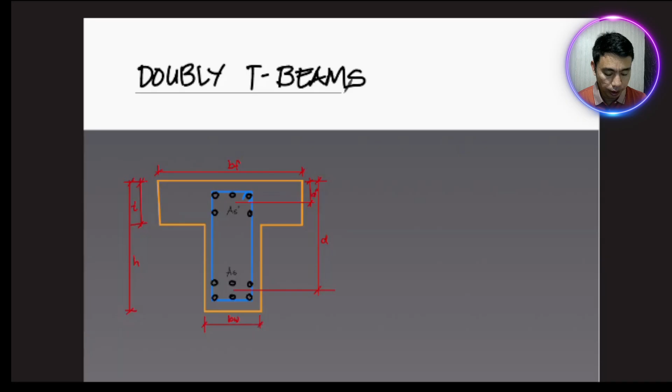Doubly T-beams. This is a continuation of our discussion regarding T-beams. Previously we discussed the design and analysis of singly reinforced T-beams. This time we move on to doubly reinforced T-beams. So this is still T-beams, but we're going to use the concept of doubly reinforced beam. It's a bit more complicated since it's doubled.

The basic concept here is we need to determine first if this is to be designed or analyzed as a T-beam or as a rectangular beam, just like the normal singly reinforced T-beam. We have two cases here, actually many possible cases, but the first step is to determine if we are solving a rectangular reinforced beam concept, or is it a T-beam.

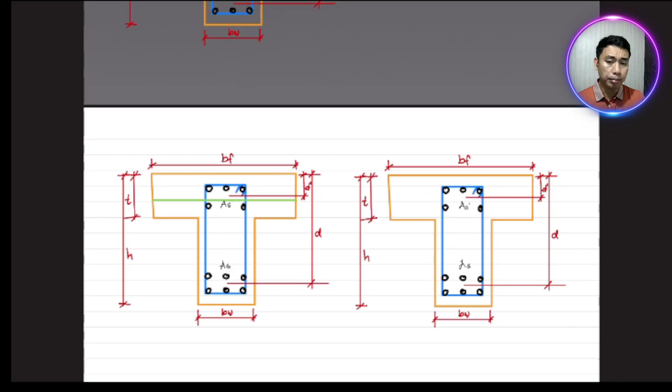So when can we say that the section must be designed as rectangular? We know the concept, let me show you. In the first figure here, normally the compression of concrete is at the top, if simply supported and the section we're analyzing is at the midspan.

Now if the area of concrete being compressed, that is our compression block, if the depth of the compression block is not greater than the thickness of the slab, or the T section, then this case will just be analyzed as a rectangular beam, like a normal rectangular beam.

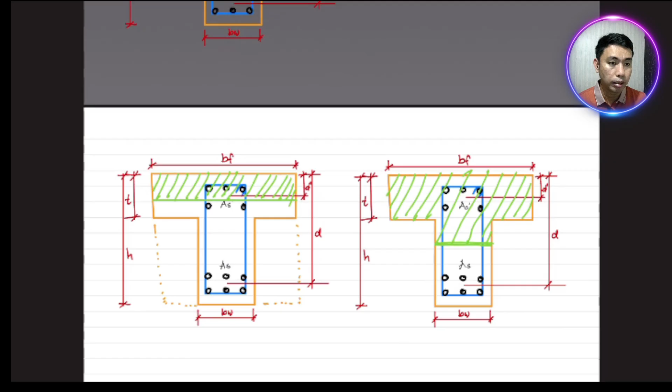Now in the case of a T-beam, if we found out that the depth of the compression block of concrete is greater than the thickness, let's say in the second case here, you can see in your screen, the compression of concrete reaches down to the bottom.

So this time we need to add another variable that we commonly term as this distance, Z. Overall this is our compression block, A. On the other side, this is just our A. A here is less than the T section thickness, while here, A is greater than T.

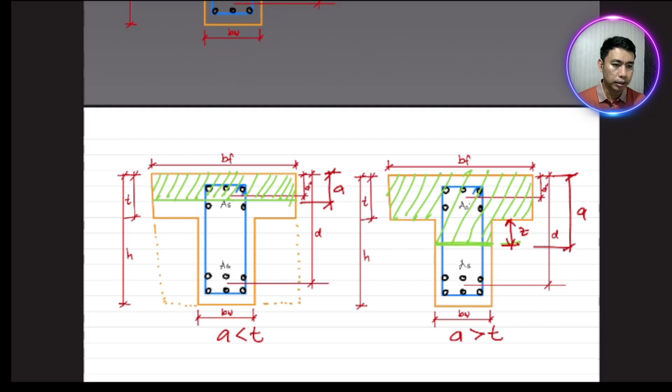So there are two cases. Now let's add the concept of doubly reinforced. In doubly reinforced beams, we again have two cases. You can see here, this is As, and this is As prime at the top.

So there are also two cases depending on whether our steel yields or not. Remember that in doubly reinforced beams, sometimes we need to assume first whether it yields or not, then check our assumption if it's true that it yields. So there are two cases. The first, let's start with when it yields: Fs greater than or equal to Fy, and Fs prime also yields, greater than or equal to Fy.

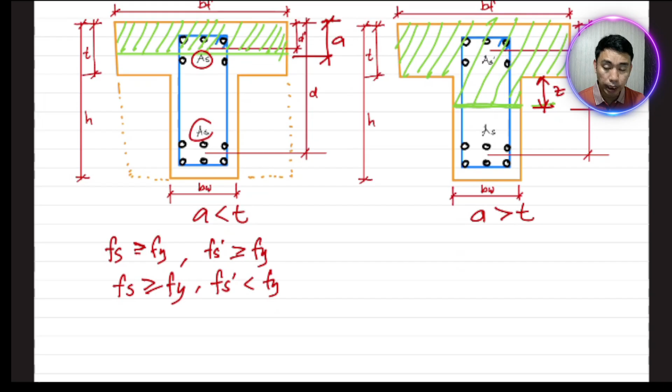More on that will be discussed in our example. Okay, let's have this example.

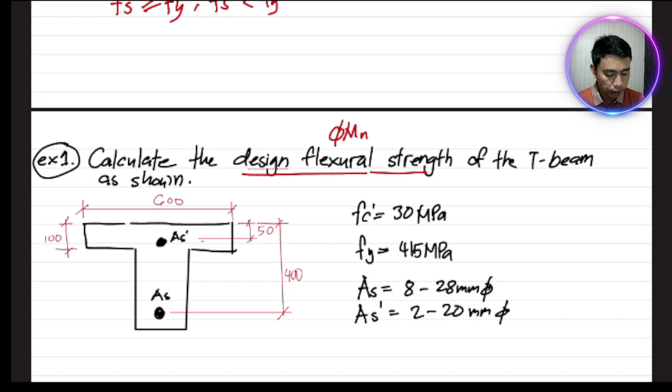Calculate the design flexural strength. When we say design flexural strength, this is phi Mn, there's a phi. When there's no phi, it's just nominal, just Mn. When it's design, there's a phi. So, calculate the phi Mn of the T-beam as shown.

So we have a T-beam. Can you see it on the screen? Is it clear? Okay, so we have BF equal to 600. And then we have this one that's missing, this is 250. So the thickness of our slab is 100. And then we have As prime.

Meron palang AS sa baba. Ang AS natin sa baba is meron tayong 8 na 28mm as AS, while ang AS prime is dalawang 20mm lang.

So ganito lang ang ilagay ko dito, ideal lang na vertical lang na steel.

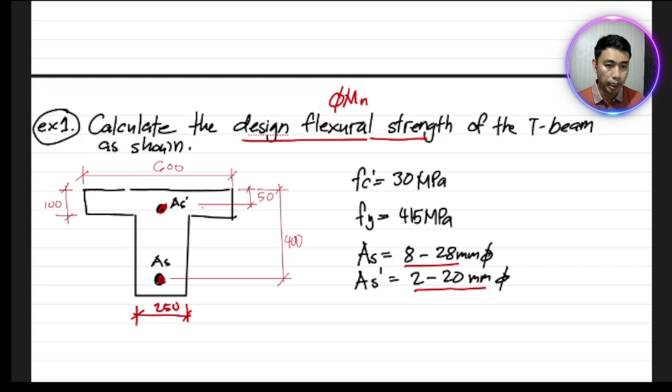Let's solve this one. Before solving, maybe we can compute first, sa book makikita ninyo hindi niya ginasolve una yung total area ng steels. So for me, I just like to solve first para hindi tayo magbalik-balik o hindi na madagdag doon sa equation.

We can simply compute AS is equal to 8 na 28mm, so we can have 8 times pi times 28 squared over 4. Using the calculator, this will be equal to 4926.017 mm squared.

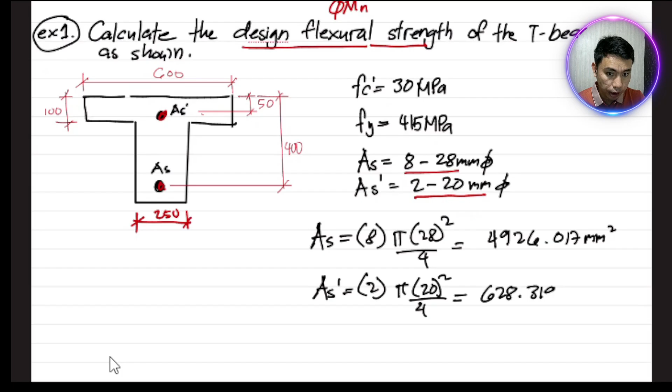Now our AS prime is equal to 2 times pi times 20 squared over 4, so this is 628.319 mm squared. How about beta 1?

Let's solve na lang yung beta 1 kasi para hindi na tayo magbalik mamaya. So beta 1, this is 30 megapascal, so greater than 28. That means our formula is 0.85 minus 0.05 over 7 multiplied by the difference of FC prime to 28. So this is 0.836.

The first step we are going to do, let me add page, is to check first if doubly or singly reinforced. So how do we check if doubly or singly?

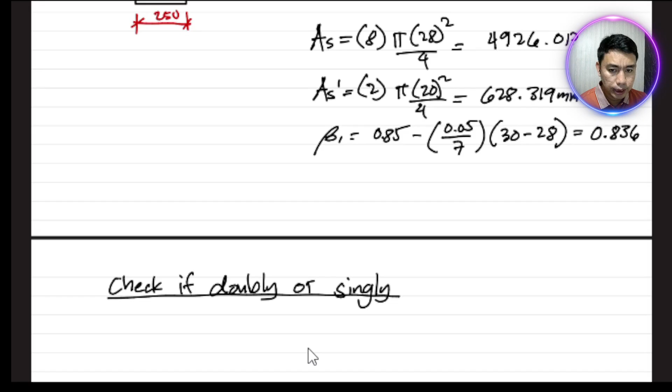By the way, let me go back. Ang D natin dito, if you look at the figure, ang D natin is 400, while the D prime is 50. Now let's check if doubly or singly.

Paano tayo mag-check ng doubly or singly? So we will base that to rho max. Ang rho max, this is the value, the maximum value of the rho wherein we are still in singly reinforced. Any actual rho greater than rho max, then we can say that that will be doubly reinforced.

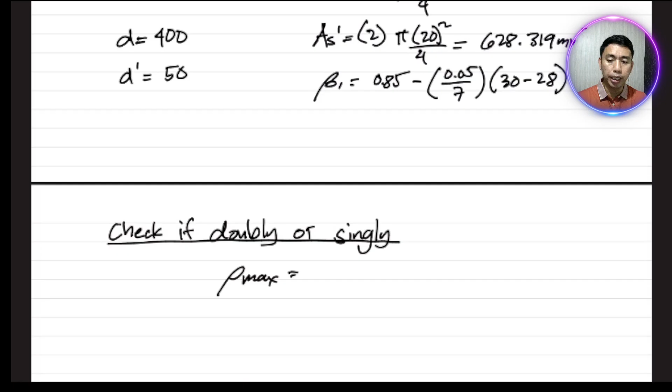So rho max is 0.85 times beta 1, FC prime over Fy, times 3 over 7. Let's plug in 0.85 times 0.836 na beta 1 natin. FC prime is 30, the Fy is 415, times 3 over 7. Using the calculator, this is...

0.02201. Now let's compare that to the actual rho. Actual rho, base lang sa singly reinforced yung actual rho natin, so that will be AS over BW times D.

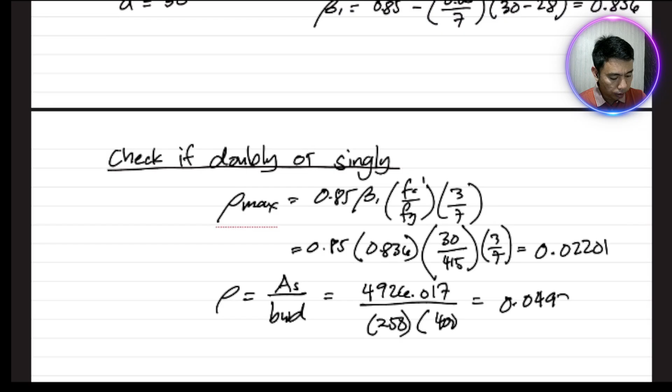So this will be AS natin is 4926.017 divided by 250, by D natin is 400. So this is 0.04926. Here we can see na rho is greater than rho max.

Therefore this is a doubly reinforced. Okay, so dito na tayo sa doubly reinforced. Analysis natin sa doubly reinforced, first is we need to assume, that's ganun naman talaga always sa analysis.

By the way, dalawang concept ito: analysis or design. Ang analysis or investigation, meaning meron ng section, meron ng area ng steel, and then we just investigate what is the maximum or what is the capacity, determining the capacity. Pero ang design, it means determining the steel area. So analysis and design, yun yung kaibahan.

So sa analysis, mostly mag-assume talaga tayo na yung steel natin is mag-yield or not. So the first thing is first assumption: assume all steel will yield. Anong ibig sabihin nun? Meaning ang Fs natin is equal to, at saka Fs prime will just be equal to Fy. We'll always start with the easiest assumption kasi kung hindi mag-yield, medyo makikita natin sa calculation natin mamaya, medyo nakakalito yung equation.

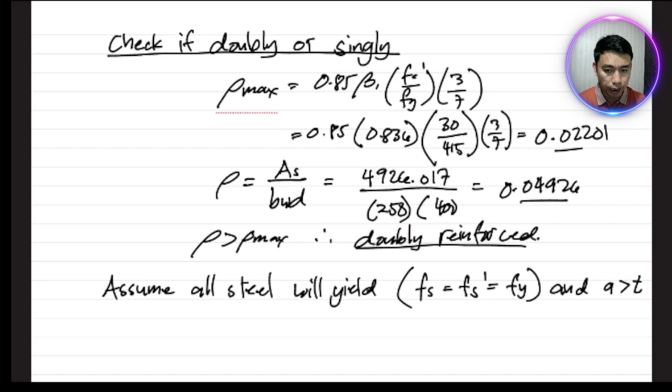Okay, so paano natin i-solve yan? So mayroon tayo, if I go back here sa analysis ng T-beam, sa baba, mayroon tayong compression, tension di ba, meron tayong tension dito, tension ng steel. And then dito is compression, compression ng concrete, CC, at saka compression ng steel.

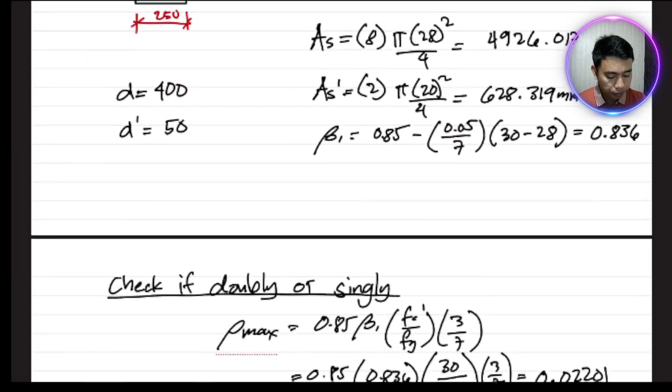So tatlong force ito: ang tension ng steel, compression ng steel, yung sa taas na compression na steel, and the compression ng concrete. So dapat mag-equal itong tatlo. Since we assume na all steel yields, meaning ang compression ng concrete plus compression ng steel should be equal sa tension ng steel, yung sa tension part ng steel.

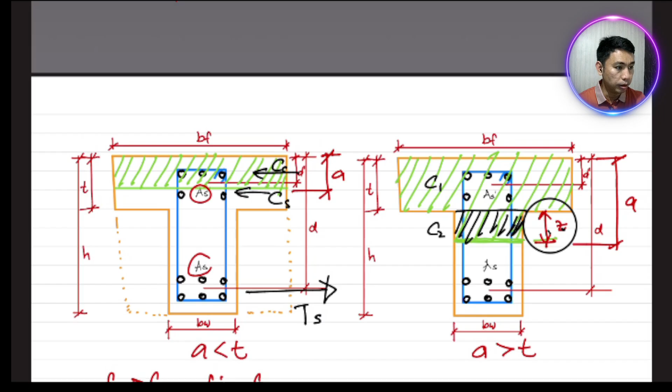Ito, dito na part. So, this is C1, ito yung C2, sa compression ng concrete. Ano nga yung compression block ng concrete? 0.85 of FC prime times the area ng concrete, let's say A1, kasi meron tayong dalawa, A1 at A2. Then another 0.85 FC prime times the second area yung sa baba. Plus compression ng steel, ano yan? It will be AS prime times FS prime. This should be equal to the area of steel times the stress ng steel.

Now, it turned out that the Fs and Fs prime is just equal to Fy, which meron tayong value. So we can just solve the equation here: 0.85 of FC prime is 30. Ano yung area 1 natin? Yung thickness, thickness 100 times BF. Thickness times BF natin is 600.

Area 2, yung sa baba ng T-beam, is 0.85 of... ano yung depth? Yun yung Z. Maybe I'll change the color of Z para ma-identify talaga natin kung ano yung hinahanap natin. Z times the BW times 250. Ito yung area 1, ito yung area 2. Then plus AS prime, FS prime.

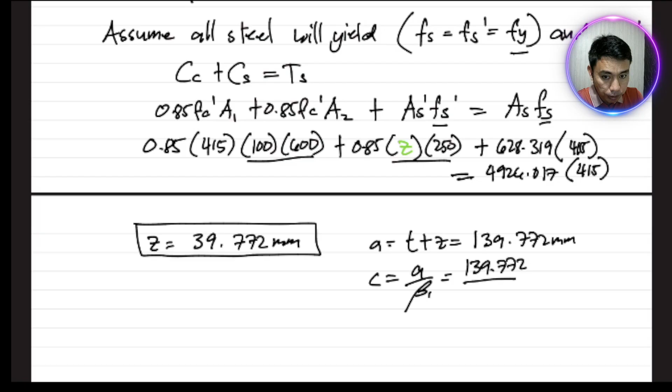C is A over beta 1. So this is 139.772 over beta 1 natin, I forgot the beta 1, 0.836. So this is 167.248 mm in C. Now, bakit ko kailangang isolve itong C? Because we need that to check our assumption.

Okay, check yung assumption natin. Let's start with Fs. Check natin kasi nga nag-assume tayo dito. So, sa mga assuming dyan, you need to check. So, check assumption. Fs is equal to 600 times D minus C over C. Kung nag-study ka ng double reinforce, familiar ka na sa this one.

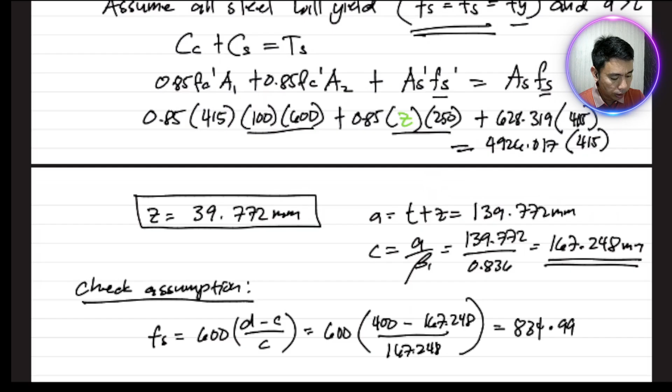So, this is 600 times D natin is 400 minus C, 167.248, over 167.248. So, ano yung Fs natin? 834.992 megapascal. Nag-yield? Ano yung FC prime, Fy natin is only 415. So, that means nag-yield siya, meaning Fs yields.

How about the Fs prime? So, correct yung assumption natin. First assumption natin, ang A is greater than T. And then, ito ang Fs, yield siya. Now, pag nag-yield siya, in computation, that doesn't mean na itong value ng Fy ang gamitin natin, FS na 834. Any value na beyond FS, beyond FY, sa FY lang tayo ang gamitin natin na value.

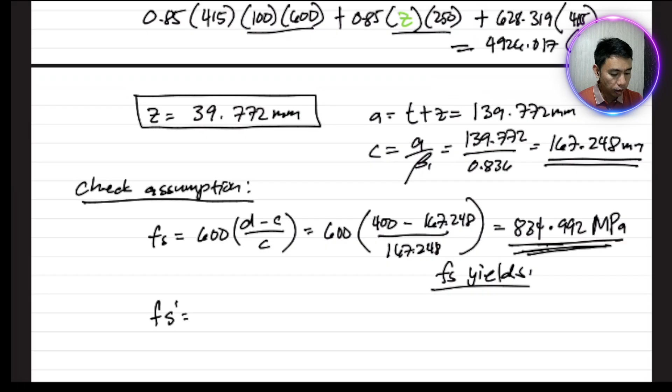Ginagamit lang itong value dito sa pag-check lang. Okay, so ang FS na lumabas dito is 834, meaning nag-yield siya. So ang FS prime naman is 600 times C minus D prime over C. So this is 600 times 167.248 minus D prime, ang D prime natin is 50, over 167.248.

So this is 420.626 megapascal. So this is still greater than, dito sa taas tayo, Fs is greater than Fy, Fs prime here is greater than Fy. Therefore, the assumption is correct.

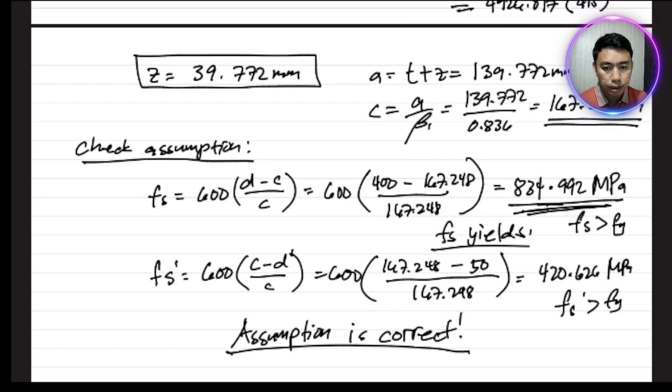Sir, what do we do if hindi yung correct yung assumption natin? If not correct, then we need to assume again na ang steel does not yield. So, kung may iba naman yung equation natin, just like this one kanina, ito yung Fs prime natin at saka Fs, diretso Fy na siya. Pag nag-assume tayo na hindi siya nag-yield, then we need to input this value ng Fs, 600 times D minus C over C. At saka sa Fs prime, kung hindi siya nag-yield, ang assumption natin hindi nag-yield, we need to solve for this value. Then, let's solve the variable, kung ano yung maiwan na variable, it's either C or A, then solve that variable.

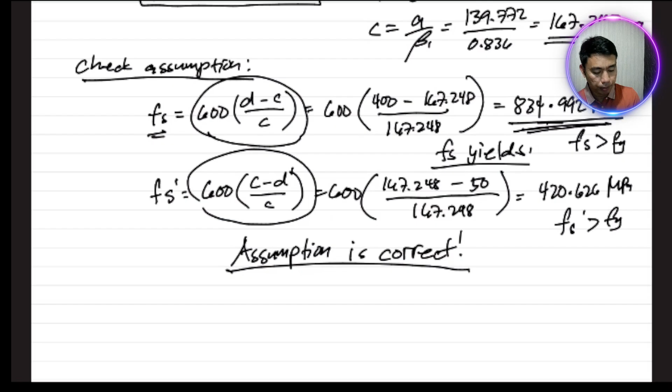So, but in this example, mamaya sa next example, assume tayo na hindi nag-yield. But in this example, pag nag-assume na tayo na nag-yield siya, diretso na tayo sa equation ng moment.

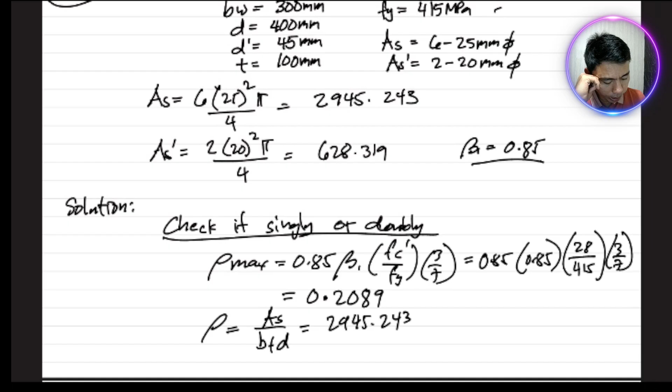Check our rho, the AS over B. Let me check if this is B double. It should be BFD. So our AS is 2945.243. Let me check if... BF, our BF is 700 times 400. Let me pause for a moment.

Let me check on the calculator. 2945 divided by 700, divided by 400. Oh, this is wrong, wrong. Sorry, it should be BW, not BF. Our BW is 300.

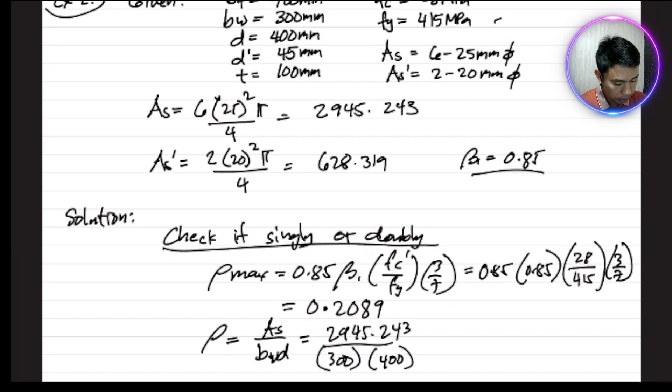AS is 2945. Wait, so this is 0.02454.

Our rho is greater than rho max. So this is doubly reinforced.

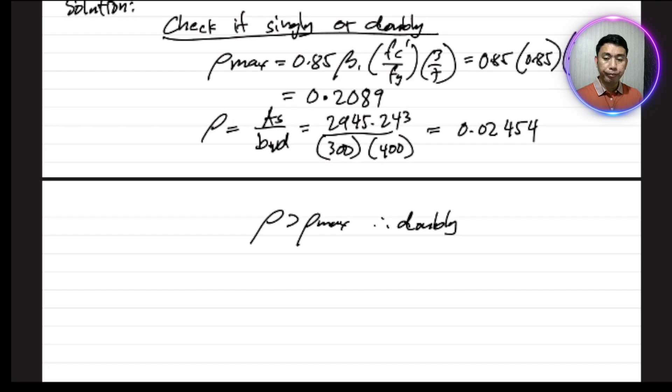Now, if this is doubly reinforced, let's assume that all steel yields. Meaning, Fs is equal to Fs prime is equal to Fy. And A is greater than T, okay?

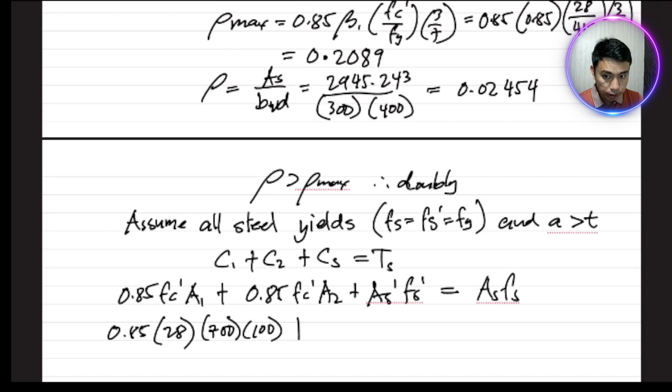So let's check this first: compression 1 plus compression 2 plus compression of steel is equal to tension of steel. So the first compression: 0.85 FC prime times area 1, plus 0.85 FC prime times area 2. Area 1: 0.85 times FC prime which is 28, times area 1 which is 700 times the thickness 100, plus 0.85 of 28

times area 2 is Z — so this is what we're solving for, Z — times BW of 300, plus AS prime of 628.314 times FS prime of 415 should be equal to 2945.243, which is our AS, times FY of 415. So, solve for Z.

What happens now? Z is equal to negative 98.66 millimeter. So what does that mean? This is a wrong assumption — our assumption that A is greater than T is wrong, because Z is less than 0.

So this is definitely not a T-beam. It seems our first case is actually a rectangular beam, where the width is the BF, sorry, BW.

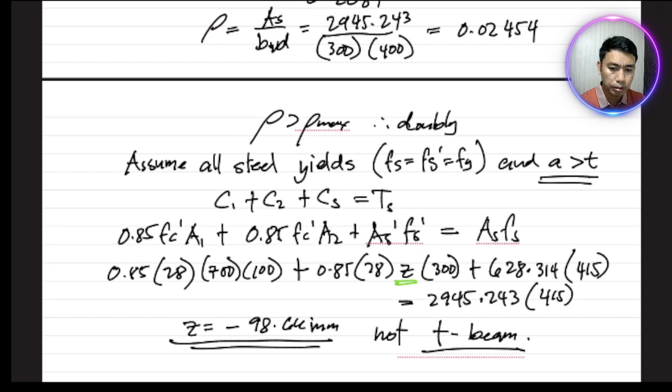So we made a wrong assumption. We need to assume again. Let's assume that A is less than T — meaning the compression block is less than the thickness of our slab.

And okay, so we have two assumptions regarding the steel: it could be that the tension steel yields while the compression steel does not yield, or both yield — Fs equal to Fy, and Fs prime also equal to Fy — or both of them will not yield. So there are many combinations.

But based on experience with calculations on problems like T-beams, when A is less than T, meaning the analysis becomes a rectangular beam, most of the time the Fs yields equal to Fy — the tension steel yields — but the Fs prime will not be equal to Fy, or something... actually, Fs is greater than or equal to Fy, and Fs prime is less than Fy. Although you could try calculating assuming all steel still yields, but this time with A less than T.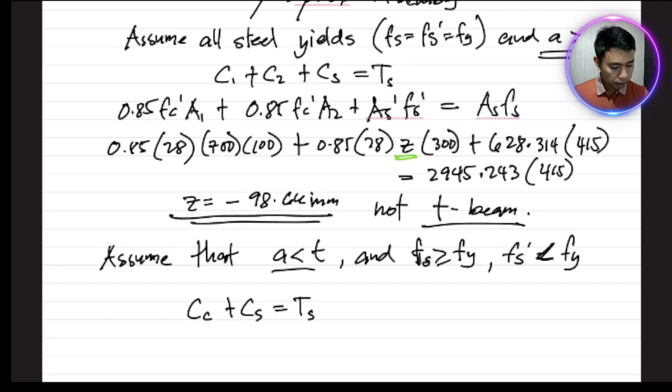So now let's expand this: 0.85 of FC prime, times the compression area — the area is now A times BF, or we can just use the variable B — plus AS prime. So it's really like a doubly reinforced beam now.

Doubly reinforced siya na hindi T-beam, but parang rectangular siya na doubly reinforced. AS prime, FS prime equal to AS, FS. Now, ganito yung technique dito para hindi kayo malito, even in doubly reinforced concept.

Kung saan yung hindi nag-yield, yan yung papalitan natin na variable. For example, here, nag-assume tayo na ang Fs is greater than or equal to Fy, meaning gawin na natin Fy. But if Fs prime is less than Fy, ito yung equation ang ilalagay natin. Saan siya makikita? Ito dito. Palitan natin yung Fs prime ng equation ng pag-solve ng Fs. So ano mangyari dito?

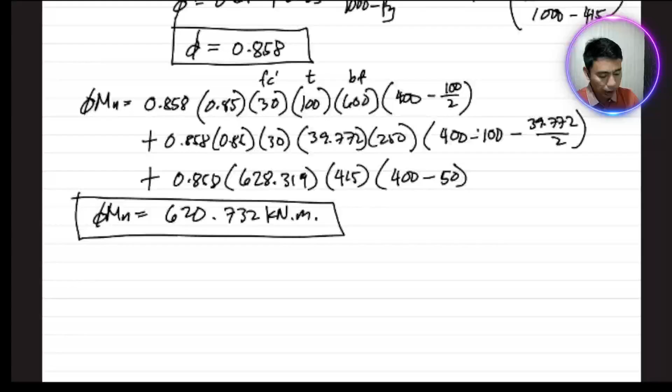0.85 of Fc prime. Ngayon, ang A natin will not use A anymore, kasi ang pag-solve natin ng Fs is in terms of C. Ito, just to remind you, saan nga yun? Ito na equation, di ba? 600 D minus C. Ang Fs prime rin, C minus D prime over C. So mga C. So what I'm trying to say is that we'll not use A here, but instead we'll convert this to C. But ano yung A? A is equal to beta 1C, right?

So we can multiply this by 0.85 C. Yan, so I'll just mark that para matanda natin C. That means we are going to solve that variable. C times B plus AS prime. Oh, ito na ngayon.

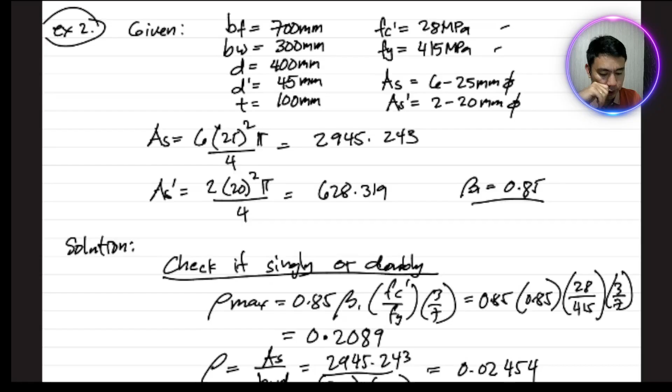FS prime, ang FS prime natin, ito yung hindi nag-yield, so meaning we'll put the actual equation here: 600 times C minus D prime. Ano yung D prime natin? D prime is 45. C minus D prime... parang nagkamali yata ako sa ito, balik ko ito, 45 o 4... I think 45 ito, yeah. Anyway, C minus D prime over C. This is equal to AS. Ang FS natin kasi nag-yield siya, then Fy na ito. Yan.

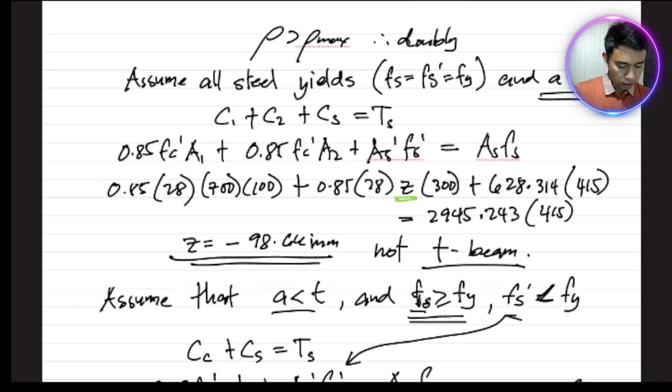So let's put the value. It will be 0.85, Fc prime natin is 28 times 0.85 C. Ang B naman natin is yung BF, which is BF natin is 700, plus ang AS prime. Ito na naman... ay, nag-error na naman yung ano to, yung tablet ko. Okay, so ayan yung mag-react.

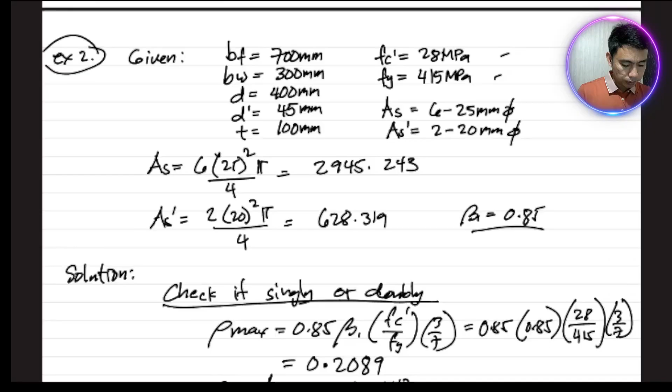AS prime natin is 628.319 times 600 times C minus D prime 45 over C, equal to AS 2945.243 times 415. Ito yung sinasabi ko, medyo complicated. So we need to solve for C.

But luckily, we have the calculator. Kung ang assumption natin, going back here, na ang Fs natin ay hindi nag-yield, papalitan naman natin ito ng equation ng Fs. So hopefully na-remind kayo sa doubly reinforced analysis. So we can solve C here. C is equal to 75.548 millimeter.

Then once we have our C, we can solve our A. A is just equal to beta 1C. So this is 0.85 of 75.548, this is equal to 64.216 millimeter. So what happened? A is less than T, tama? So this is correct assumption. Kasi nag-assume tayo na ang A is less than T, so baba lang siya ng T within the thickness T. So tama, kasi ang thickness natin dito is 100, ang lumabas na A is 64. So correct yung assumption natin.

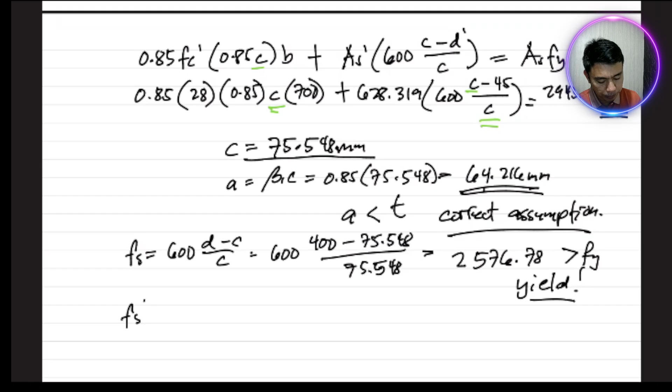Okay, now ang assumption natin sa Fs prime, hindi siya nag-yield. Let's see kung hindi siya nag-yield. Kung hindi nag-yield, ang expected output natin is less than Fy. So, take note the equation: C minus D prime over C. So this is 600 times C, 75.548, D prime is 45 over C, 75.548. This is equal to 242.62. Ang Fy natin is 415, ang lumabas dito 242. This is less than Fy, so does not yield.

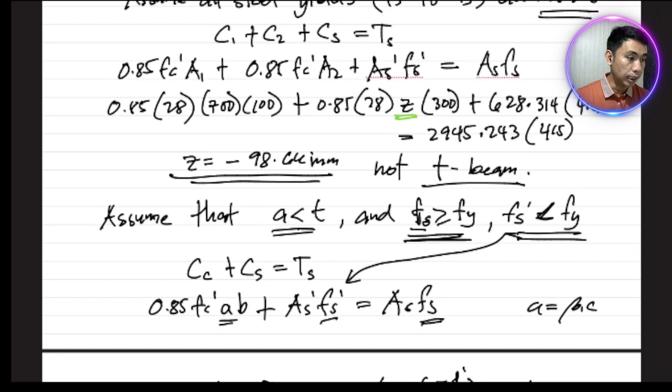So that means correct yung assumption natin, yung pangalawang assumption natin: ang A is less than T. Ito yung pangalawang assumption natin, di ba? A is less than T, ang Fs mag-yield, ang Fs prime will not yield, less than Fy. So correct yung assumption natin.

So let's continue. Ano yung phi natin? Sulat ko na lang dito yung A less than T, ang Fs is greater than Fy, ang Fs prime is less than Fy. Okay? Meaning correct yung assumption natin. Tama ba nga? Ganyan ba spelling ng assumption? Okay, correct yung assumption. Now, ano yung phi?

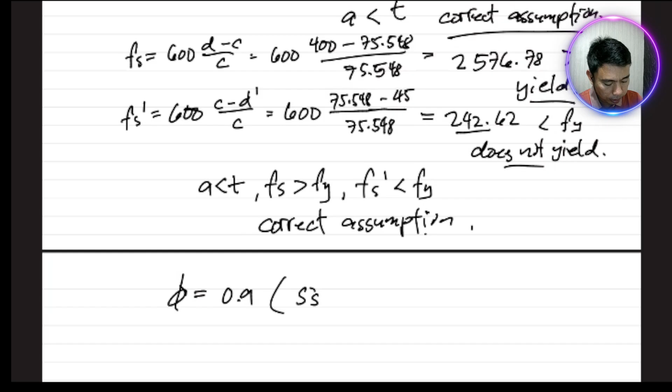Ang phi natin is equal to 0.9. Bakit? Kasi ang Fs natin, ang Fs is greater than 1,000 megapascal. Ano yung Fs natin dito? 2,576. So greater than 1,000 megapascal.

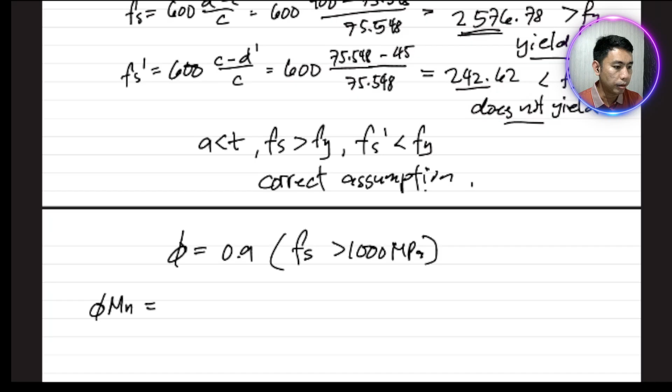That means we can solve na yung moment is equal to... Okay so it's already 1 hour in my recording. Phi times 0.85 fc prime a b, times d minus a over 2, plus, dalawang equation lang, as prime fs prime times d minus d prime. Kasi nga hindi siya T-beam. Yung T-beam, dalawang compression.

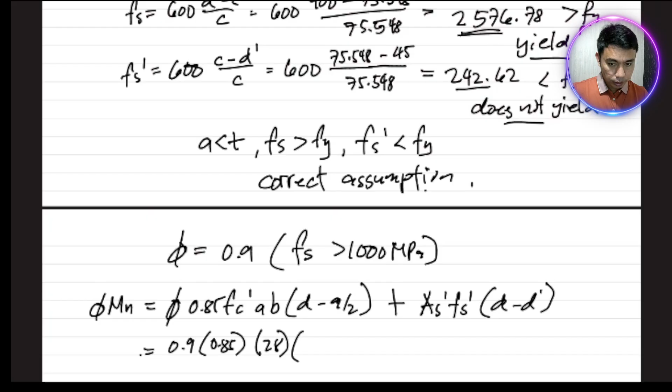So ang phi natin is 0.9 times 0.85 times fc prime of 28 times a. A is, where's the a? 64.216. B is 700 times D minus A over 2. So this is 400 minus 64.216 over 2. Baba ko na isulat yung continuation.

AS prime is 628.319 times, hindi na FY, FS prime. Ano yung nakuha natin na FS prime? 242 lang siya. 242.62 times D minus D prime. 400 minus 45.

Yan, nagloko na naman yung tablet ko. Napuno na siguro ng data. Sorry, this will take time. Ayaw niya mag-down. Pero sumusulat mo. Ay ito na, nag-down na.

Okay, so phi mn ngayon natin is equal to 402.93 kilonewton meter. Okay?

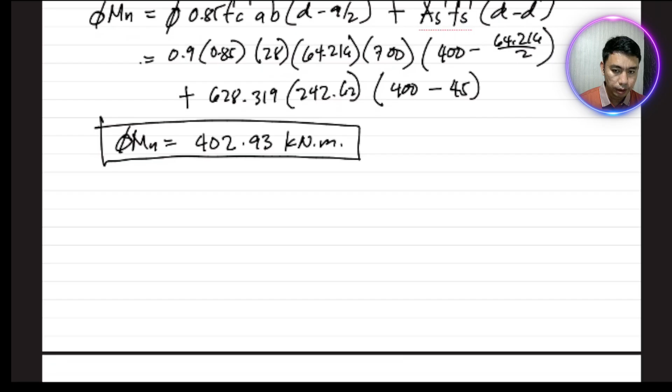So yan yung concept ng T-beam. We'll have one more example. This time, pang board exam ito, lumabas ito sa mga board exam, nasa book rin. But this example is nasa support yung section. Normally, ang ginasolve natin is yung section natin sa gitna ng beam.

Okay, now pag nasa gitna ng beam, ang compression sa taas, tension sa baba. Pero kung nasa support, kung ito yung column, at saka ito yung beam, pag nasa support, ang moment diagram natin is pa ganyan. So this is negative moment, positive moment, negative moment.

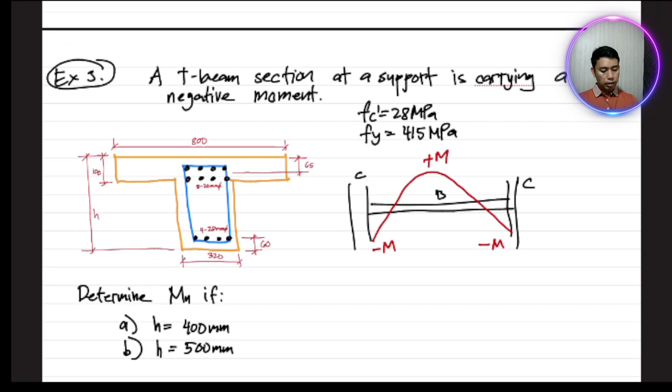So ano ibig sabihin pag negative moment? Pag negative moment, yung tension sa taas, kasi yung sa taas yung mag-bend. While sa baba, yung compression. So that means kung meron tayong problem like this one, kung carry siya ng negative moment, meaning sa baba yung compression natin, yung sa taas is tension.

Di ba pag ang area ng concrete, ang tension is we neglect that area ng concrete sa tension. So that means kung ganitong example, dito sa, if you can see here, wait, let me draw a T-beam here.

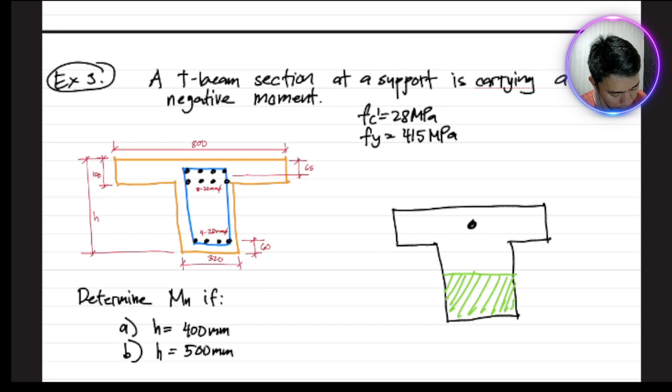Okay, so kung negative moment, dito sa baba yung compression. That means dito sa baba yung compression natin. Itong sa taas na area ng steel, yan na yung magiging AS natin. Yung area dito sa baba, ito na magiging AS prime. And then yung analysis natin is automatically parang rectangular beam lang siya na yung BW lang yung ginagamit natin. Parang ganito lang yung analysis natin, rectangular. Hindi na ito kasali, kasi nga lahat naman dito na area is we neglect that because that is concrete under tension. So ganun yung analysis natin.

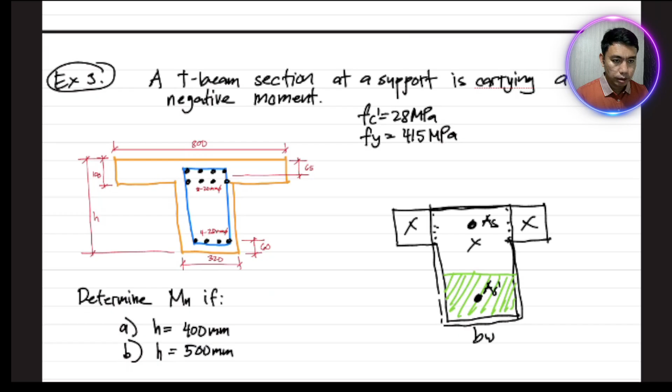Let's solve this example. So a T-beam section at a support is carrying a negative moment as shown. Assume that FC prime is 28 megapascal and Fy is 415 megapascal. And then these are the dimensions. BF natin is 800, ang BW is 320.

Yan, ang nakasulat dito na 60 from the centroid, yan. Centroid. So basically in this problem, this will be equal to our D prime, yung 60 natin. While yung D natin, yung D is from here to here, D. Now this is equal to H minus 65. Tama? Yan na yung D. Kasi nga nakabaliktad na yung T-beams natin.

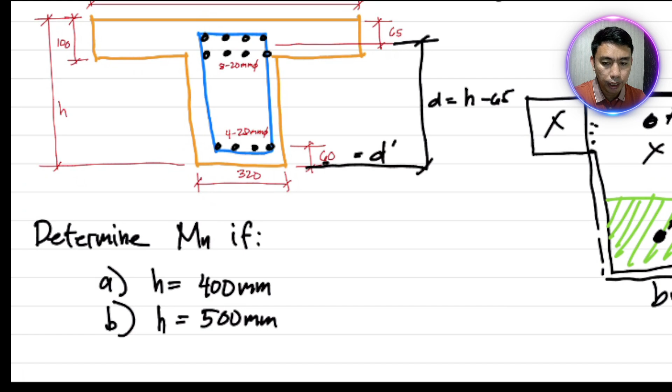Hindi nakabaliktad yung analysis lang natin ng nabaliktad ng area ng concrete. Sa baba na ngayon yung compression, sa taas is tension. Now determine if H is 400 mm and secondly if H is 500 mm. Okay, so ganun yung analysis natin.

Okay, so ano na ngayon yung D natin? Letter A. Sa letter A natin, yung D is equal to 400. If H is 400, so this is 400 minus 65. So this is 335 mm.

I hate this, nag-hang talaga yung ano ko. Nang bumili ng bago.

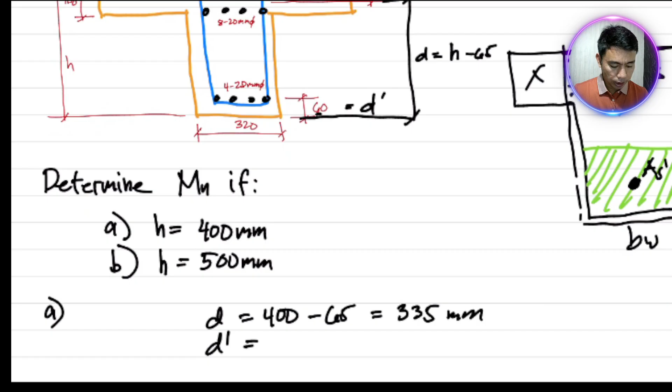Okay, anyway D prime is, ano yung D prime natin? Baliktad na no, ito na yung bottom cover. So D prime natin is 60. And then yung B natin is equal to the BW. This is equal to 320. Ayan, ito siya.

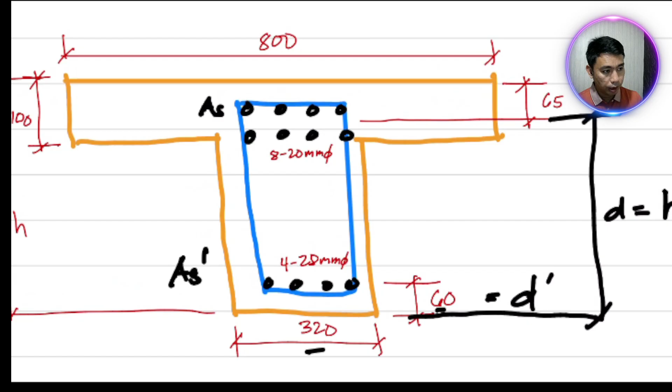Okay, solve muna natin yung AS. AS is ito pala, ito hindi ko na ano. So dito, in this case, ang AS natin is dito, while here is AS prime. So ang AS natin is 8 na 20 mm. So I can write 8 times 20 squared over 4 times pi is equal to 2513.274 mm squared.

The AS prime, okay, ang AS prime is 4. Nagluloko na yung tablet ko.

AS prime is 4 na 28 mm, which is 2463.009 mm squared. Okay, so again let's check if doubly.

Check if the section will act as singly or doubly reinforced.

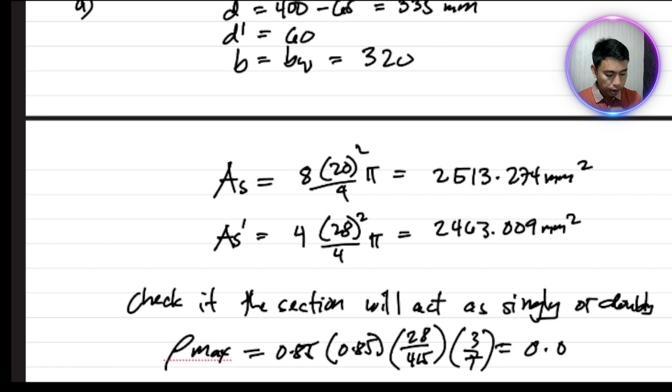Solve for rho max equal to 0.85 beta 1, 0.85 times FC prime 28 over Fy 415 times 3 over 7. This is 0.02089.

Check for rho, AS over BD. This is 2513.274 over BD, which is 320 times 335, equal to 0.02344. So rho is greater than rho max. Therefore, this is doubly reinforced.

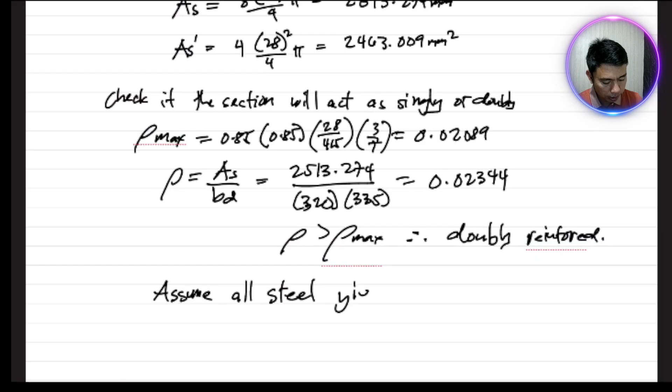Assume all steel yields. Now, when we assume all steel yields, meaning Fs is equal to Fy and Fs prime should also be equal to or greater than Fy.

So how do we do that? We need to solve for this. Why didn't we assume A is less than T or greater than T? It's because our analysis is like a rectangular beam. It's not a T-beam because the compression is at the bottom. Purely rectangular, so no need to solve for Z here.

Just solve for A. So compression of concrete plus compression of steel is equal to tension. Compression of concrete is simply 0.85 FC prime A B plus AS prime FS prime is equal to AS FS.

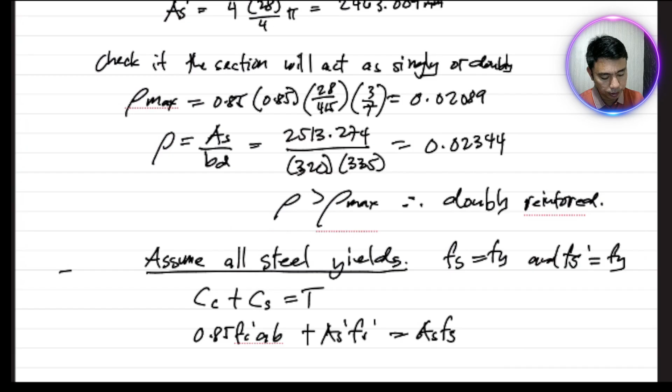So let's solve for A. Now our A is equal to AS FY, we write FY because we assumed it yields, minus AS prime FY over 0.85 FC prime B.

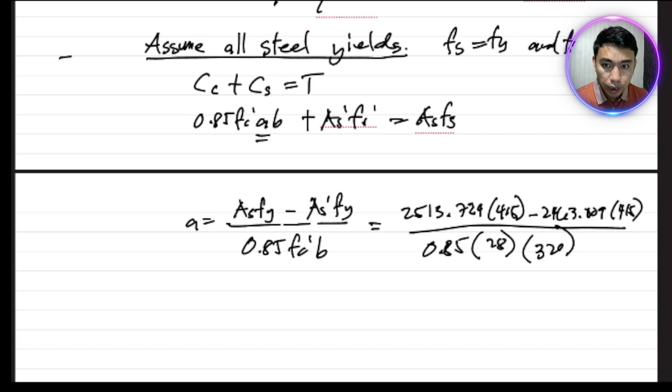So we'll input the value. This is 2513.724 times 415 minus 2463.009 times 415, over 0.85 times 28 times B is 320. So our A here is equal to 2.739 millimeter.

And our C is equal to A over beta 1, this is 2.739. I'm pretty sure this assumption is wrong because 2.7 millimeters is too small for the compression block, meaning most of the compression is carried by the steel, not the concrete.

So here our C is 3.222 millimeter. Now let's check the Fs, our assumption.

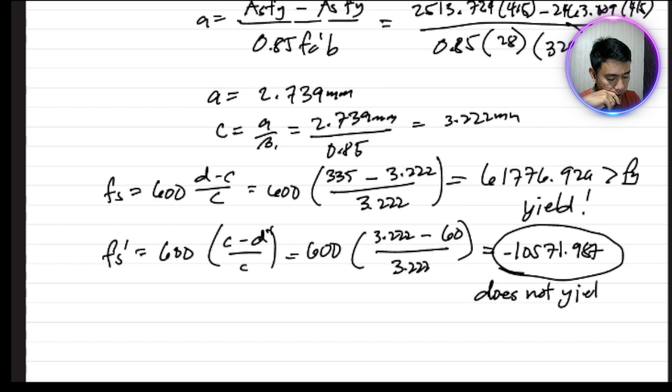How about the FS prime, the compression steel? Where is that, at the top or bottom? Should be at the top. So this is 600 times C minus D prime over C, which is 600 times 3.222 minus 60, D prime natin, over 3.222. So this is equal to negative 10571.987. So our assumption is wrong because the result is negative, meaning it does not yield. So our assumption is wrong.

So let's assume again. For our next assumption, the FS yields clearly. So assume that FS is greater than Fy and Fs prime is less than Fy.

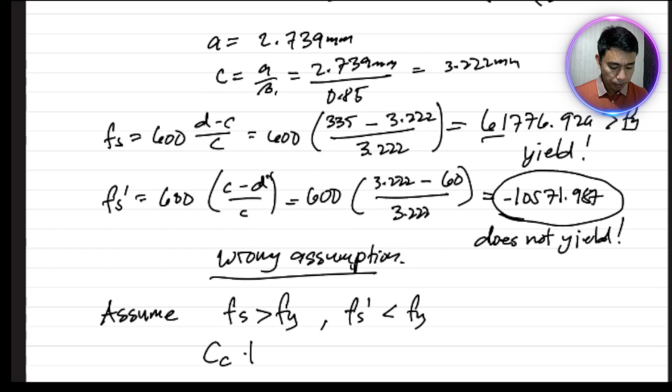So the equation stays the same, compression of concrete plus compression of steel is equal to tension. So this is 0.85 FC prime AB plus AS prime. Now, since our FS prime does not yield, we replace it with the equation 600 times C minus D prime over C equal to AS FY.

Let's put the value in terms of C. So this is 0.85 of 28, our A is 0.85 C, take note of that C here, times B, our B is 320, plus AS prime. AS prime is 2463.009 times 600, times C minus 60 over C. This should be equal to 2513.274 times 415, since the steel yields here.

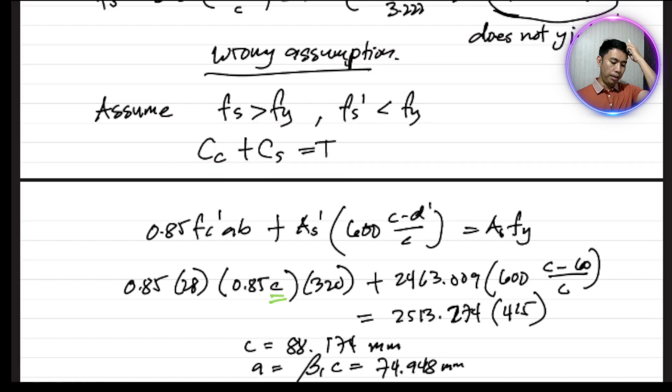Now, once we have these values, let's check again. Since we assumed Fs yields and Fs prime does not yield, let's check.

Check assumption again. Fs is 600 times D minus C over C. So this is 600 times D, 335 minus 88.174 over 88.174. So this is 1679.574. This is greater than Fy. Correct yung assumption natin. Correct.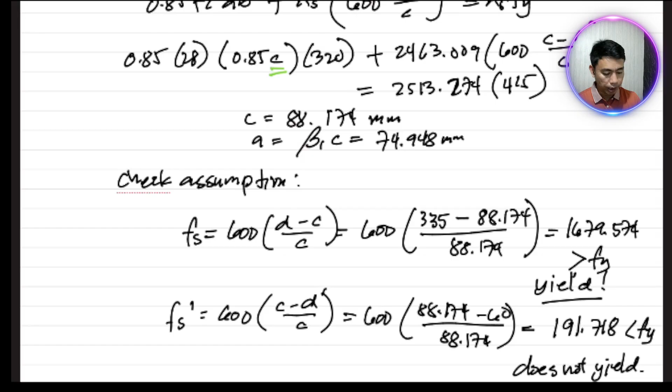Now if we check for Fs prime, 600 times C minus D prime over C, this is 600 times 88.174 minus 60 over 88.174. This is equal to 191.718. This is less than Fy, meaning does not yield. But that's okay kasi ang assumption natin at first is hindi nag-yield yung Fy. So meaning assumption is correct this time.

So pag correct yung assumption, let's solve the Mn. Hindi, ang tanong lang dito is nominal. So kung nominal, wala yung phi. Pag ultimate, meron yung phi. So Mn is equal to 0.85 Fc prime AB times D minus A over 2, plus AS prime Fs prime times D minus D prime.

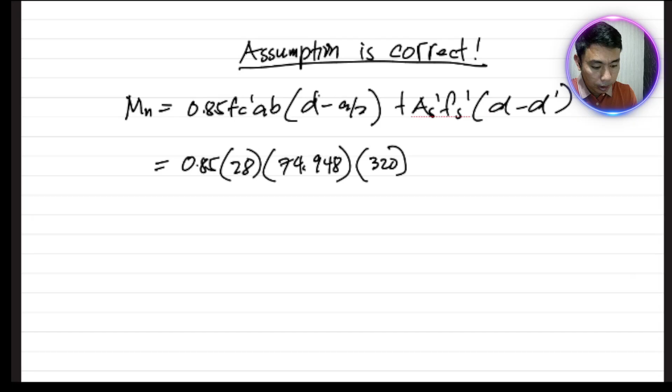So if we'll put the value, 0.85, 28, ang A natin is 74.948 times B is 320 times 335 minus 74.948 over 2, then plus AS prime, 2463.009 times 191, so ito na yung Fs prime natin, 191.718, multiplied by 335 minus 60 D prime.

Okay, so we'll solve here. Mn is equal to 299.685 kilonewton meter.

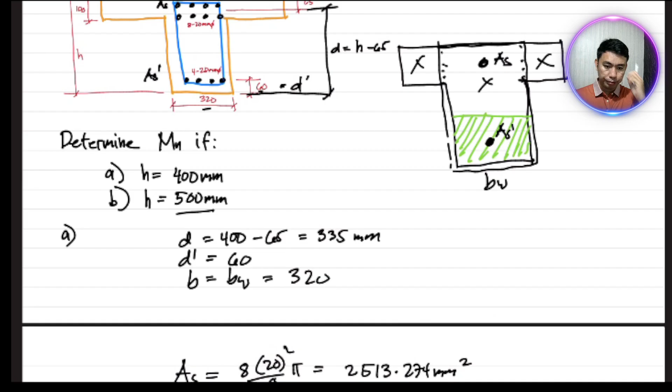Now the second question actually here, what if H is 500? I think 125 na. Okay, anyway, continue na lang natin. Tapusin na natin ito, letter B. What if H is 500 mm? Kanina sa letter A, ang H is 400.

Ano mangyari? D is equal to 500 minus 65. This is 435. So pag ganon, 435, i-check natin kung singly or doble siya. Okay, so ano yung rho max natin? Mag-change ba yung value ng rho max? I think hindi naman, no? So this is, ang rho max is.

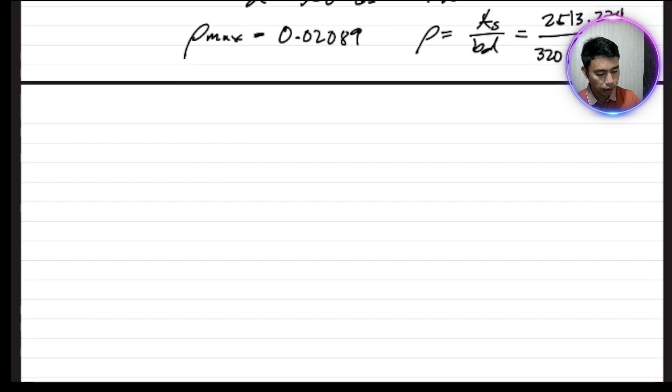0.02089. Okay, ang mag-change is ang value ng rho. Ang rho is AS over BD. Ano yung AS natin? 2513.274. Ang B natin is 320. Ang D ngayon is 435. So if you will check the value ng rho, ang rho natin dito ay equal to 0.01806.

0.01806. Okay, now compare mo ngayon, ang rho is less than rho max. So what does it mean? Kung ang rho is less than rho max, this means this is singly reinforced. Okay, so kung singly, ibig sabihin, kasi pabaliktad na tayo ngayon, yung beam natin ganyan, rectangular beam natin ganyan, sa baba yung compression, okay? Tataas yung AS, area ng steel, okay?

So meaning, ang AS prime natin, ang area ng steel sa prime, is useless. Okay, kasi nga, singly reinforced lang siya. Sa singly, what matters most is only the AS, not the AS prime. Ang AS prime magamit lang sa doubly reinforced. Okay, so that means we'll analyze this beam. Kung ang H is 500, we will analyze this beam as singly reinforced rectangular beam.

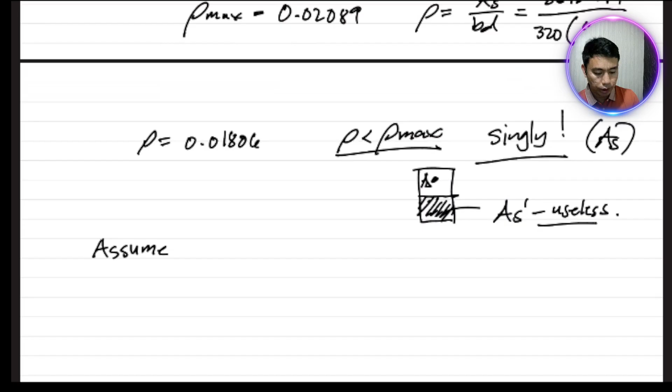Okay, hindi siya T-beam, hindi rin siya doble. Okay, so ganun pa rin, sa singly reinforced, mag-assume naman tayo. Assume that the steel yields. Sa checking, mag-assume talaga tayo always kung mag-yield ba yung steel. So compression is equal to tension. Sa singly, dalawa lang: compression ng concrete, tension ng steel. Pero sa doubly, dalawang steel. Mayroon compression ng concrete, compression ng steel, at saka tension ng steel.

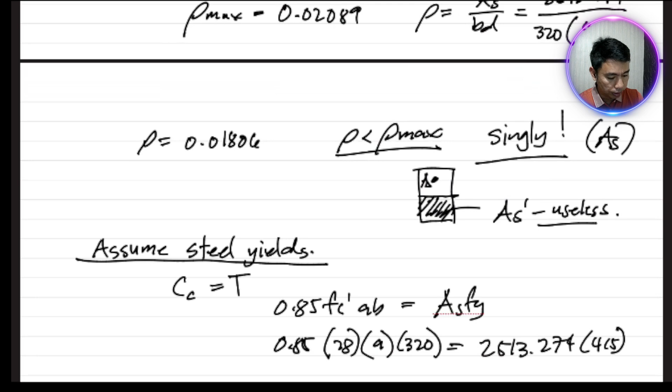Okay, so ito medyo madali na lang siya kasi singly lang siya. 0.85 Fc prime AB should be equal to AS Fy. So this is 0.85 of 28 times A times 320 equal to AS natin is 2513.274. This is 415. Kaso nagloko na naman yung ano ko. Ito. Okay, so let's solve for A here. Ang A natin is.

136.95 mm. So ang C is A over beta 1. This is equal to 136.95 over 0.85. This is 161.117 mm. Now once we have the C, let's check.

Fs. Ano yan? Pag solve, Fs is 600 times D minus C over C. This is 600 times 435 minus 161.117 over 161.117. Okay, so this is equal to 1,019.938. Okay, so this is a correct assumption.

Sinsya na kayo, nagluloko yung ano ko eh. So kung correct yung assumption natin, correct assumption, nag-yield yung steel. So we can just solve directly. Mn is 0.85 Fc prime AB. Ayan, ito na yung simple equation ng singly reinforced D minus A over 2. Okay, so isang equation lang, no?

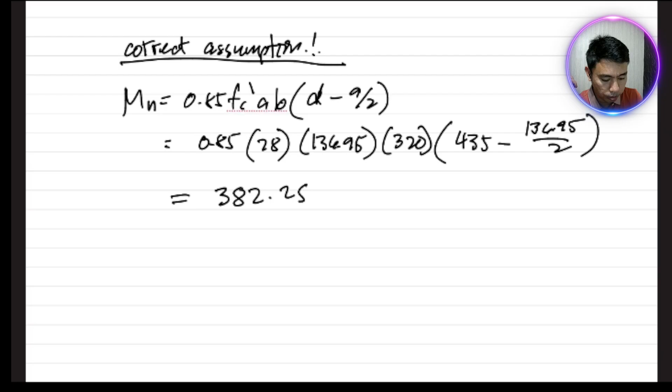So this is 0.85 times Fc prime of 28. Sorry, hindi naman. 0.85 times 28. Ang A natin is 136.95. Ang B is 320 times 435 minus 136.95 over 2. So here, using the calculator, this is 382.289 kilonewton meter.

Nominal lang hinahanap dito. Okay, so ganun yung case natin. So next topic will be shear analysis na tayo. Alright, thank you for listening.